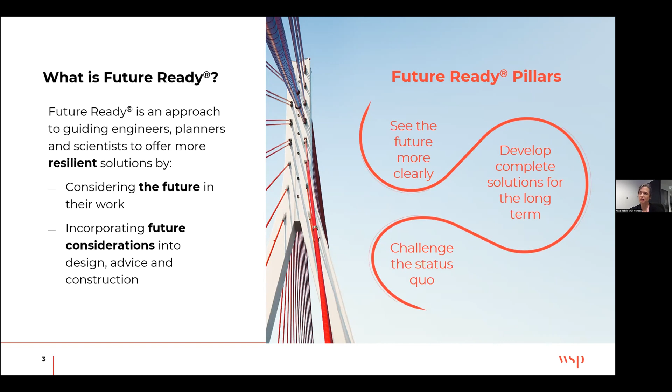Now, you're saying that's a bit high level. I will show you a little bit more of the detail into exactly how it can work.

This Future Ready framework, this is essentially it in a nutshell. These 4 different trend categories that we look at are climate, society, resources, and technology. I'll take some examples. These trends I'm showing you here are mostly from the city of Fredericton, though some data is at a more aggregate level, provincial or even national. But here's what you do.

For the climate, for example, our maximum 5-day precipitation will increase by 10% by 2050. So what does that mean for our built environment? Well, 10% doesn't sound like a lot, but it might mean a lot more area is covered by flooding than what we have right now. So that might mean you need to think about zoning setbacks. You might not want to build in places you've been building in the past.

Weather will become less predictable, which can make it a struggle when you're planning construction. Something might come up and you just might not be prepared for it. The number of hot days will increase by 250% here in Fredericton. That is massive. That could shift the tipping point of the kinds of decisions you make, economic decisions about insulation versus positioning of a building, even location of a building.

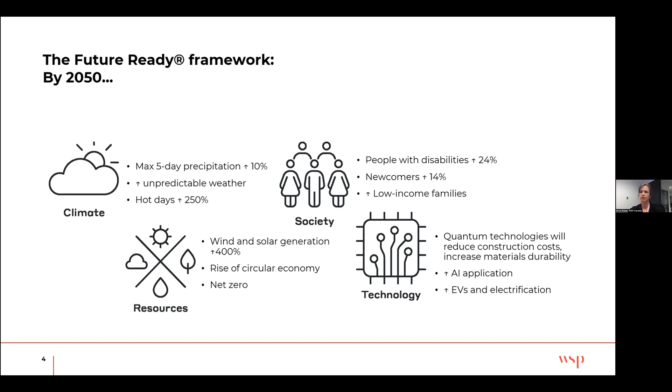So here's a major sustainability challenge in the construction industry. I try to wrap it up into what I call the bitter pill. There are 3 elements to this. There will be more construction, and the cost of each piece of construction will increase because asset lives will last less long than they have in the past.

Heat will make pavement melt. Increasing storms will batter buildings. Increasing storms and flooding mean that we actually have to replace our culverts with bigger culverts and our stormwater systems with something different. We'll have an increased demand for infrastructure.

So I showed you the increasing heat element. With increasing heat, it means we'll need to perhaps insulate more — maybe the buildings need to be insulated, maybe electric cables need to be insulated in ways they haven't. We'll probably need to provide cover for people because when they're outdoors, now they want to spend time outdoors, but it's just too hot a lot of the time. So what do we do about that?

On the water side, with increased heat, we'll simply have less water, so perhaps we need to build bigger reservoirs, for example. And then the cost of inputs will also increase. The cost of labor will increase. As you can imagine, being outside when it's hot, maybe it means you need more PPE, maybe it means you need to take longer breaks. So the construction season, the construction duration might be longer.

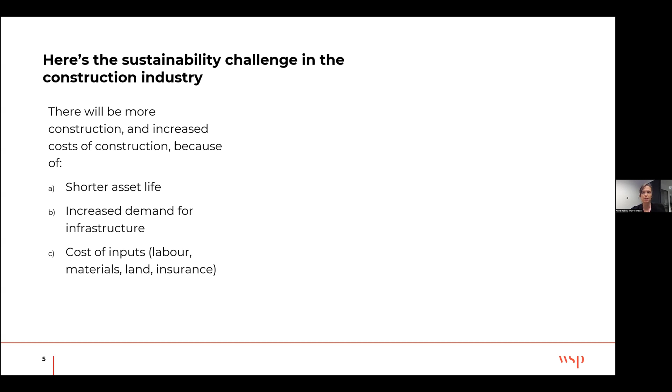Here's the bitter pill I talked about in the 3 dimensions, just for a bit of fun. You can see axis A is the replacement frequency, so the asset life just lasting less long — that cost builds up as you have to replace it more often. The quantity of asset — again, imagine increased heat and increased cover, we need more assets. And then the third dimension, C, the unit cost: what is the cost of those inputs and how will they change over time?

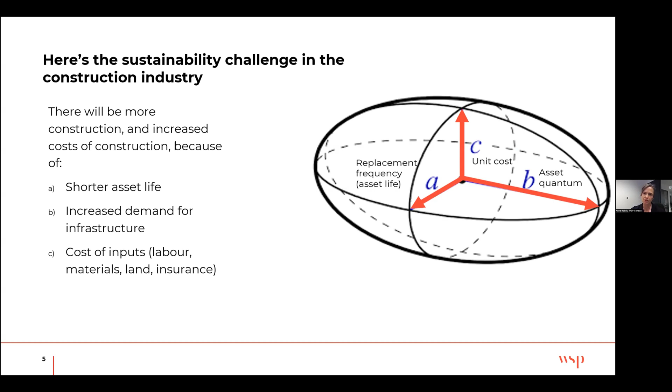Now I'm going to dive into those unit costs for a couple of examples of how climate in particular will be changing.

What you have across the top is labor. These are different elements of cost of construction: materials and equipment. The next one across is insurance, and then the next one across is time. So what I'll do for each of these elements of unit costs is show you how they'll be affected by increasing heat, flooding, and increasing storms.

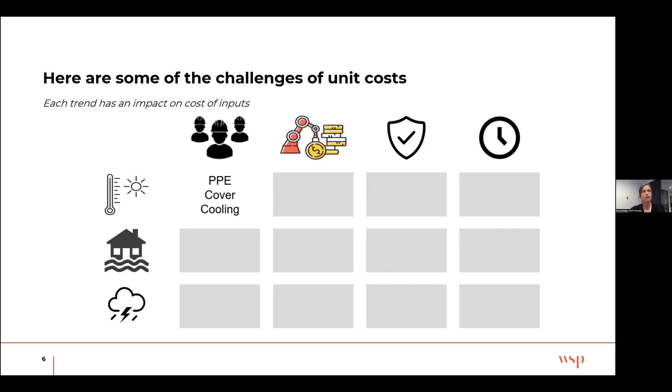So the first one you see is for labor and heat, and I've already mentioned those. People will need increased cover and increased cooling to keep them protected.

Then what will heat do to equipment and materials? Well, you'll probably have more frequent breakdowns, or you'll need more downtime for equipment. You'll also need more resistant materials, which may be more expensive. In terms of insurance, I can't say there's a lot of direct relation to heat, not one that I thought of anyway. But then in terms of time, there'll be much more downtime for your equipment and for your people. All of those are just a few examples of how the costs of construction will increase based on increasing heat.

Now, based on increasing flooding, employees will need to take leave because their properties will become flooded. I've seen some research that shows that people affected by flood take about 10% more leave, which can't be surprising at all. You need to deal with these kinds of things.

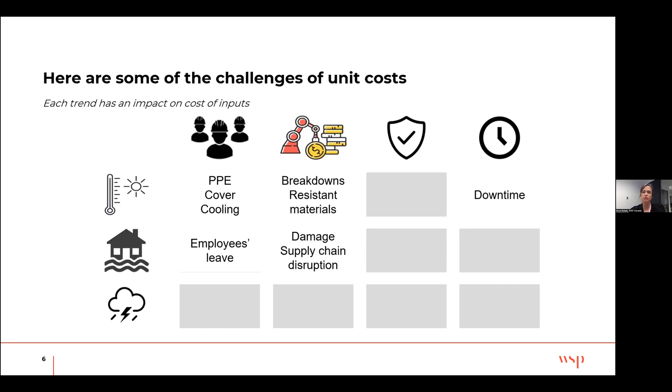In terms of materials and equipment, of course, flooding will cause damage on your site, and they'll also cause disruptions to supply chains. Now, in terms of insurance, flood insurance will start costing more because we will have more flooding. And then in terms of time, of course, there'll be disruption to schedules because of flooding. And that could be because there was a supply chain disruption, or it could simply be because you had to halt your construction because of flooding or extreme weather.

Now, finally, extreme weather, what will that do for your employees? Well, an increased risk of injury to them. In terms of equipment and materials, increased storms will increase damage on your site and increase supply chain disruption. In terms of insurance, of course, the cost of insurance for storms will increase as well. And finally, in terms of time, of course, your schedule disruption will increase because of increased storms.

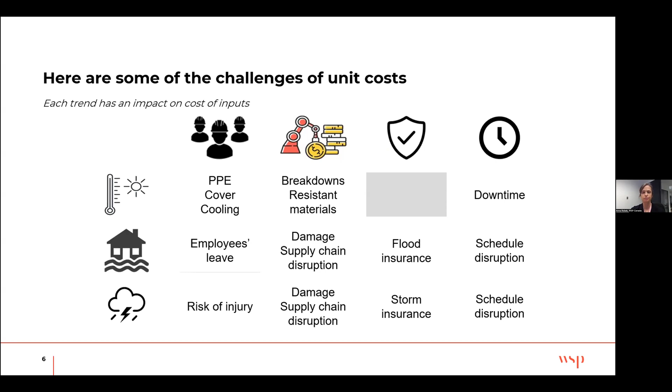Now, I did tell you that I would be diving specifically into the role of technology and how it could mitigate against these increasing cost elements. Technology is not the only way - there are some fantastic green solutions and behavioral solutions that apply not so much to the construction site, but more so to deciding what will be built in the first place. But now, diving into the role of technology specifically.

On the design side, because there's more accuracy introduced through building information modeling, that actually reduces rework, and there have been examples shown where rework was reduced by about 20%. Then in terms of the review aspect of design, that data sharing also reduces the time and cost to do reviews.

And then in construction, there are several different technologies. 3D printing, for example, can cut up to two-thirds of the cost of construction. Now, not in every instance - this is specific to complex shapes. So if you have a simple building, 3D printing is probably not going to save you anything, but for a more complex shape, it can save a lot.

Real-time location systems - just knowing where your vehicles are, where your employees are, where your materials are at any time - has been shown to reduce fuel consumption, labor, and supply chain costs by 10 to 20, 30%. Imagine knowing that, oh, we have one more pipe there, we need to order the next round in at a glance.

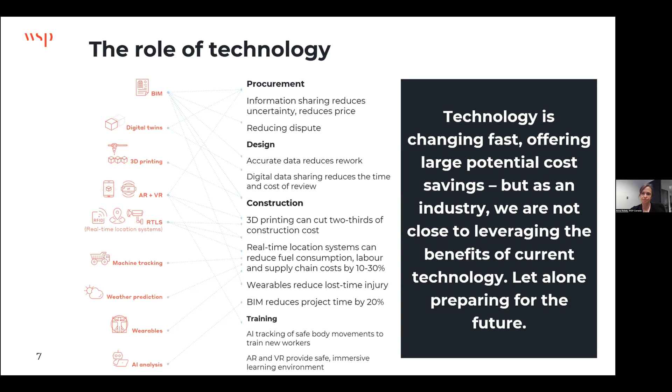The first one is simple: it's the fear of the unknown. If you've never dealt with something before, you don't even know how to make a decision about it, which is closely tied to the next one, which is a lack of experience. Of course, if you don't have experience with something, you don't know how to make a decision about it. You don't even know where to get started or how to get started.

Now, another interesting barrier is around the way we make decisions as organizations. A challenge here is that decision-making structures don't necessarily enable us to do things in new ways, to adopt new technologies. Maybe technology is in the IT department, and maybe sustainability is in the sustainability department. So how do they come together to make decisions to start bringing in smart technology that improves the sustainability of a building, for example?

A fourth barrier is simply strong, resistant stakeholders. Sometimes it's groups that have a stake in a certain material or a certain way of doing things. It could be laborers who are afraid that their jobs could be taken away.

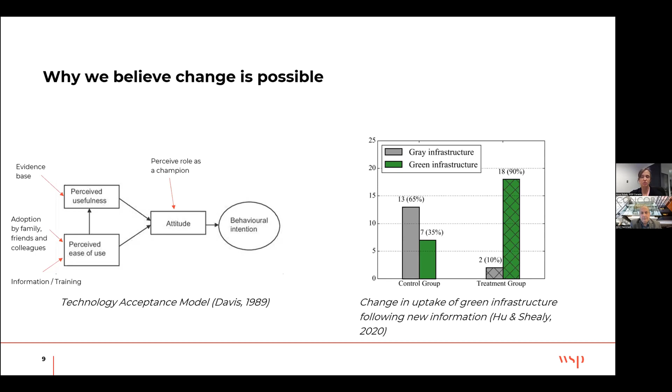Now, in our Future Ready program at WSP, we right away went to the tools and templates because we thought this would make it so easy for people—they'll get it, they'll be able to pick it up and go. And while it did make it easier, the thing we were missing early on was having people actually accountable for applying Future Ready in our projects, and a policy that set that commitment.

So these are absolutely critical to making change in industry, and that's really what I wanted to share with you today. I hope that you now believe that change is possible, and that perhaps some of these trends and their impacts are ones you hadn't seen before, giving you new ways of thinking about how you might approach them. Thank you very much.

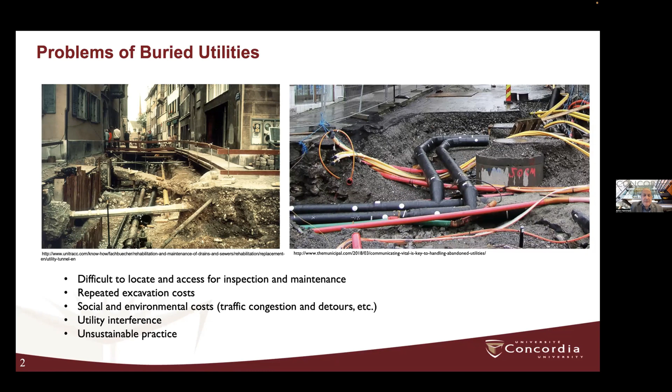So here I'm showing the problems of buried utilities. Most of us are familiar with these scenes. These utilities are buried in a way that is very difficult to locate and access for inspection and maintenance. That will result in repeated excavation and related costs, and also social and environmental costs, for example traffic congestion and detours. Also, we have utility interference, which is a huge problem. So we can conclude that this is not really a sustainable practice.

In fact, we have a very nice solution for this problem—I call it here multipurpose utility tunnels, or MUT. An MUT is an underground utilidor containing one or more utility systems that will permit the installation, maintenance, and removal of the systems without making street cuts or excavations.

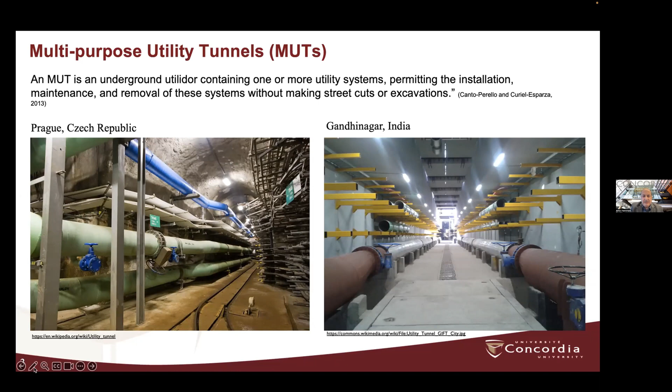We have a couple of examples. The one on the left is from Prague, which is a pioneering city in this type of project, and another one on the right from India. In fact, we also have utility tunnels at Concordia.

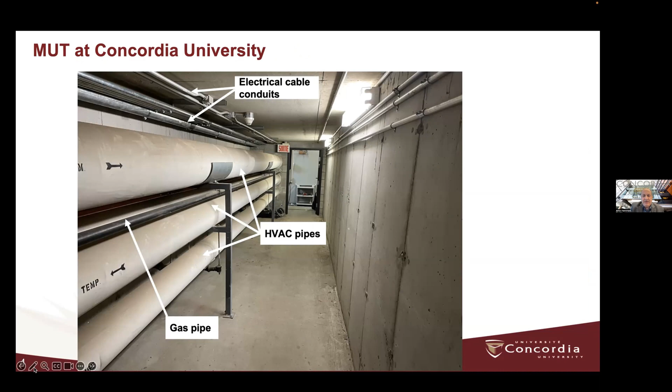A couple of weeks ago, I had a chance to visit one of these tunnels. Here you can see the different pipes for HVAC, for gas, and also the electrical cable conduits.

We can classify these tunnels according to depth. We have flush fitting, where it's not really a walkable tunnel but very easy to access. We have shallow tunnels up to 2 meters depth, and we have very deep tunnels like this one, up to about 80 meters of depth.

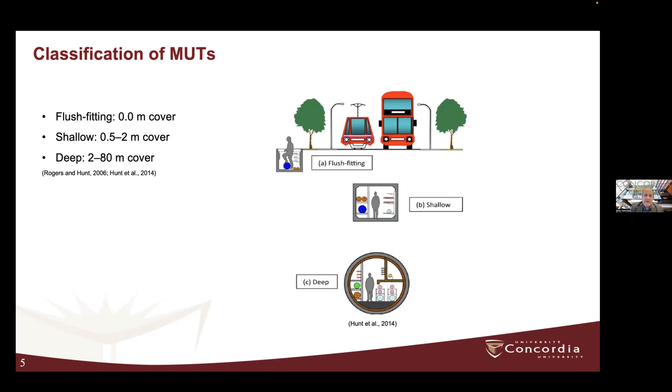Some of these tunnels were built in Qatar recently for the soccer games—they built a new city with this type of tunnel network. I have another example here from Singapore.

This is a more sophisticated tunnel where we have multiple compartments to separate the pipes, the municipal utilities, from telecom and electrical cables. So that will give more secure access to different utilities.

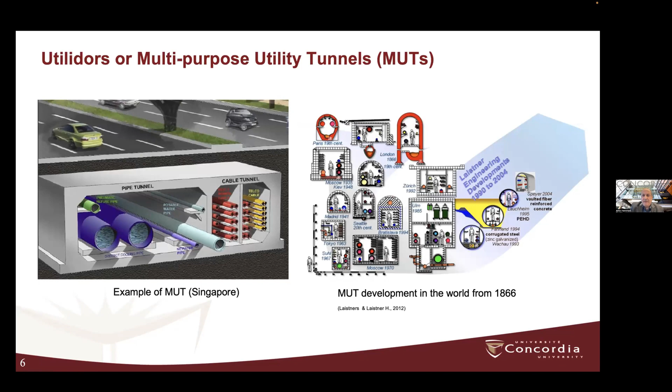This is not really a new invention. These tunnels have been used for the first time in Paris around 1866, and then another tunnel in London, then other cities in Europe, and then the idea spread to other parts of the world, as you can see here. So in the 19th century, there were only 3 of these tunnels.

And then we started seeing more of these tunnels in the Far East, in Japan, for example. And even in North America, we have many utility tunnels, but they are more in institutional facilities, like the one I showed you at Concordia, in university campuses or military bases or airports and so on, but not really under the roads. We don't have any tunnel, as far as I know, under a public road.

Here we can see more and more tunnels up to 2000. And then in the last 10 to 15 years, we see a lot more of these tunnels built in China. In fact, that's because of an initiative by the Chinese government. They have about 10 pilot cities where the Chinese central government was paying for these tunnels, and they are still building a lot of these tunnels. We can see also some of the projects in the Middle East.

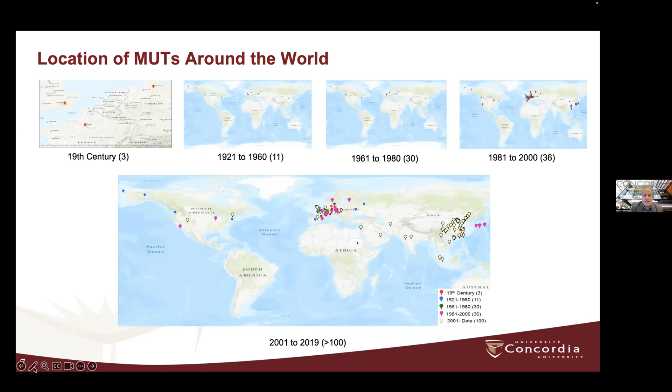So it's not a single tunnel under a single segment of the road. It could be a network of tunnels.

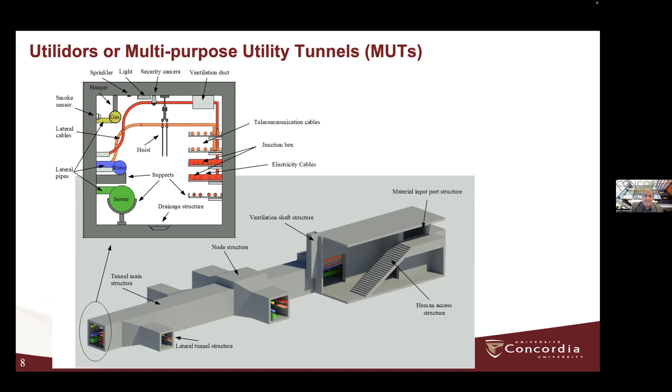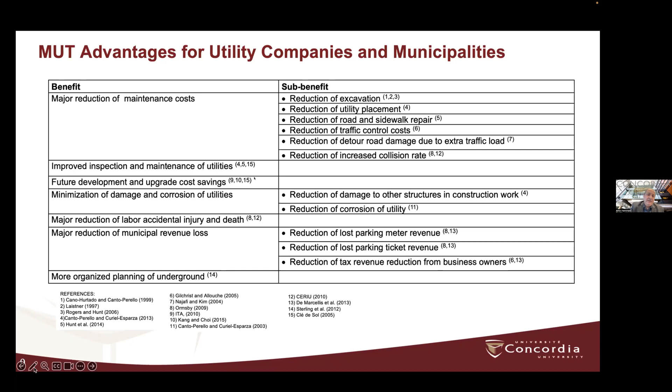We can appreciate the advantages of these tunnels, but I have here 2 slides. The first one talking about advantages for utility companies and municipalities. We have major reduction of maintenance cost, improved inspection and maintenance of utilities, future development and upgrade cost saving because we have extra capacity for the future, and many other benefits.

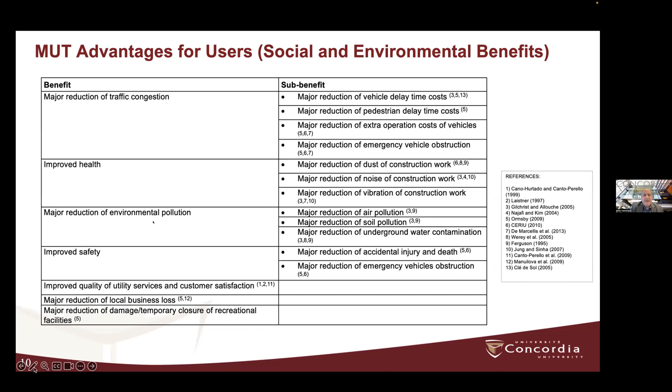We have also more benefits for the users. So here we are talking about social and environmental benefits, such as major reduction of traffic congestion, improved health, improved safety, major reduction of environmental pollution, and so on.

On the other hand, we have some disadvantages, mainly the high initial cost, especially in case we are building these tunnels in developed areas, developed urban areas, so that will require a lot of cost to be assigned to relocating the utilities and so on.

We have also compatibility and safety issues, for example, gas leakage. In fact, we have solutions for that. We have a lot of sensors that can help in the early detection of any leakage.

We have coordination and governance issues. Who is going to manage and control the access to different assets and so on? We have also security risks like terrorist attacks.

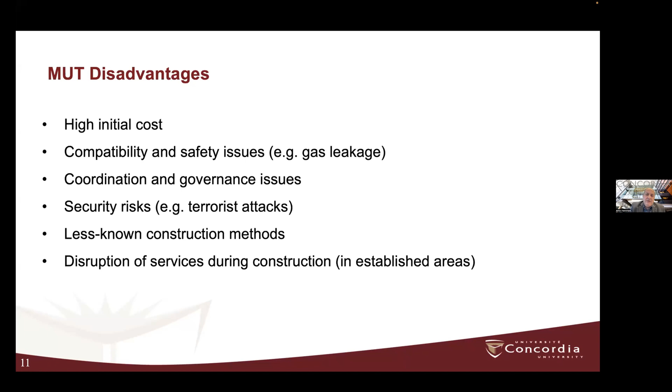And as mentioned in the previous presentation, we have less known construction methods for this type of projects. And as I mentioned, related to the cost, we have disruption of services during construction, and that's more specific to building these tunnels in established areas.

We looked also at the economy of MUTs. So here we have the different phases of the life cycle of a tunnel, the planning and design, the construction phase, the operation phase. We have these two major groups that I mentioned for the costs related to the utility providers and municipalities versus the social and environmental cost.

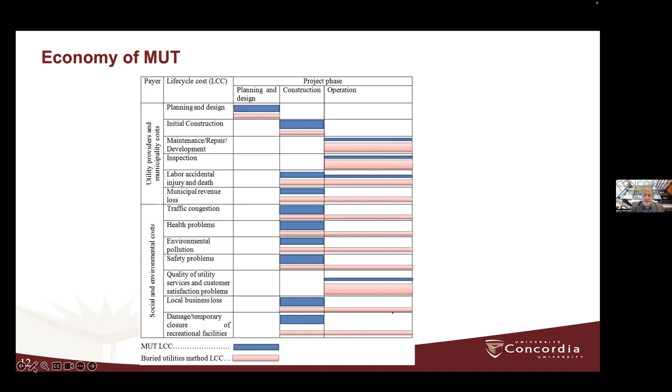As we can see here, we have the pink showing the costs related to buried utilities versus the blue bars showing the cost related to the MUT. So we have high initial costs here for the MUT versus very high social and environmental cost for the buried utilities in the operation phase of the projects.

We did a couple of studies. I'm showing here the study related to the MUT economic assessment and cost sharing. So in this study, we have two phases. Phase one was about the life cycle cost assessment or economy assessment.

So here we want to see if the MUT is an economical solution for a specific location. I should mention here that the MUTs are not applicable everywhere because they are costly. So here we are going to compare the life cycle cost of buried utilities versus the life cycle cost of MUT.

Based on that, we can decide whether a certain location is a feasible potential target for the MUT.

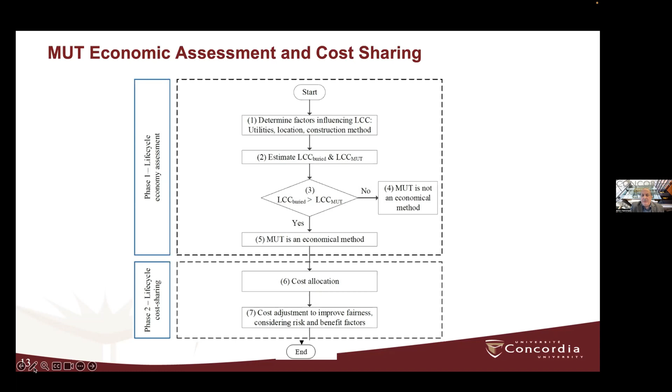Phase two is about the life cycle cost sharing. Here we try to see how the city or municipality is going to share the cost with different service providers, such as electricity, gas, or telecom companies. We have to think about how to share the cost, and we may want to adjust it to improve fairness, considering risk and benefit factors.

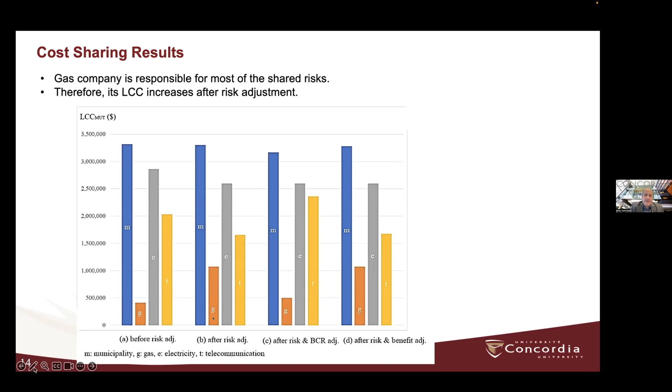We had another study about location selection. As I mentioned, we have to define the most feasible locations. We applied multi-criteria decision-making for MUT location selection. There are a lot of factors to consider, but basically we have to look at high traffic density above ground for the roads.

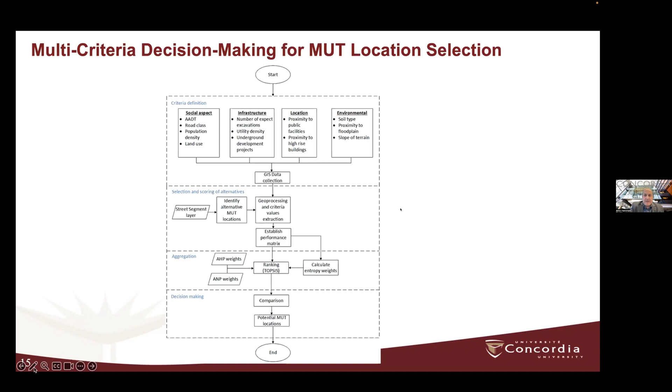We collected a lot of data from the city and applied it in a case study. We have a lot of GIS maps related to traffic, road class, population density, land use, and water break rate, plus the electricity network and so on. We didn't have access to all the data from private companies, but we got enough to do the study.

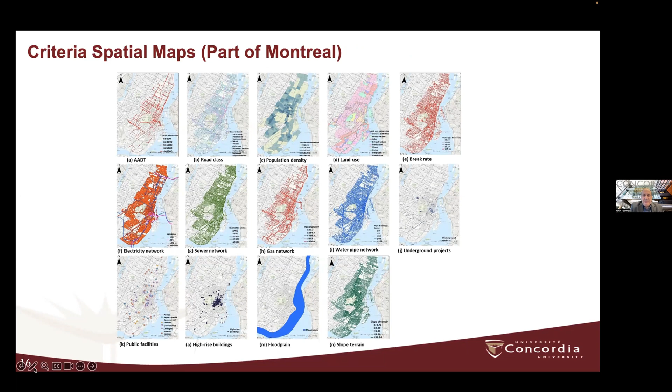We also had other data related to public facilities, the location of high-rise buildings, and so on. Based on this study, we were able to locate the most feasible locations for the utility tunnels. As expected, we found that most of them are in the downtown area, and we assigned a score to each location.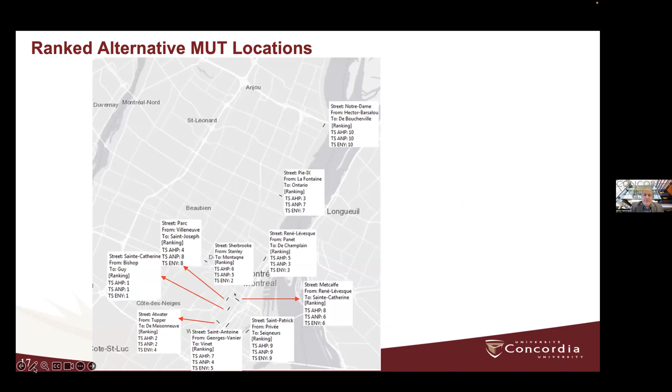This study resulted in a report published by CERIU, an institution for research on public infrastructure systems, supported by funding from the city of Montreal. We have the report in both French and English. I was very happy to see that Montreal is taking this initiative very seriously, and they considered embedding one of these tunnels in a recent urban development project.

While doing this research, I felt a bit lonely, and the students also felt a little frustrated, because we thought we were the only ones in North America doing this type of research. Then, around five years ago, I was very happy when Terri contacted me from New York City and mentioned they have a similar initiative, which I think she'll explain in her part of the presentation. Thank you.

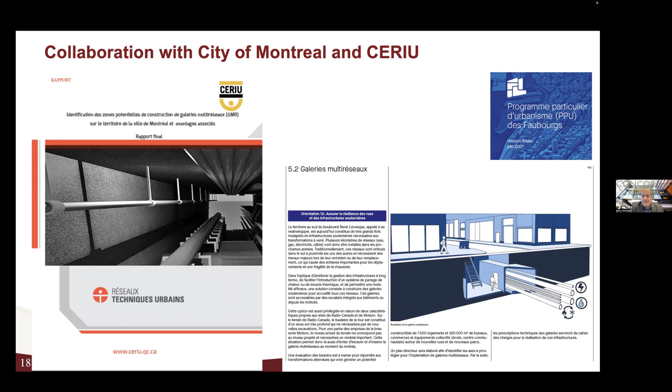Okay, let's see if this works. Share screen. Oh, I think, Amin, you have to undo that. I stopped sharing, I think, no? Okay, hold on, this is where everything breaks down for me, it's technology. Okay, let's see—is it the same one you sent me yesterday? I can share on my... yeah, but I should be able to, I'm going to try not to swear because that's bad.

Hold on, do you see this? Is everybody seeing my presentation? No, okay. Okay, all right, let me share on my side, Terri. If you do that, that would be great. Yeah, sure, okay, let me get back into the Zoom. Oh, there we are.

Okay, let me... can you see the slide? Not yet, we see you. Oh sorry, one second, share screen. Okay.

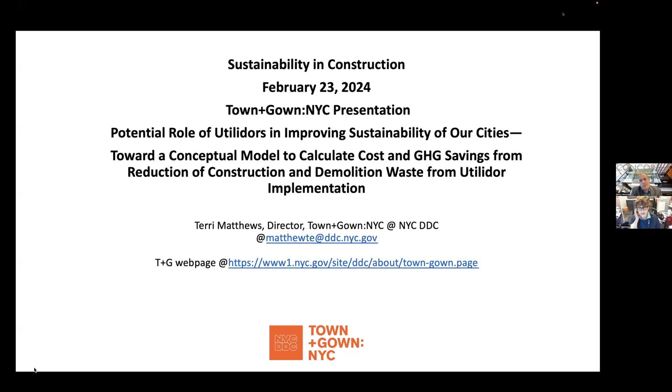So you don't have to read this, but the thing is there are like 10 people who talk about utilidors. You're talking to 2 of them. We're all looking at the same literature. Professor Hammad's work has been really helpful on our end, but it's financially sustainable. And everybody's been saying it's environmentally sustainable. You can talk about traffic emissions. I mean, calculating all this stuff is really hard when we don't even, it's just hard.

And so in this article, I thought, well, you can definitely calculate the savings from not needing to do construction in the future, which is getting to the next slide.

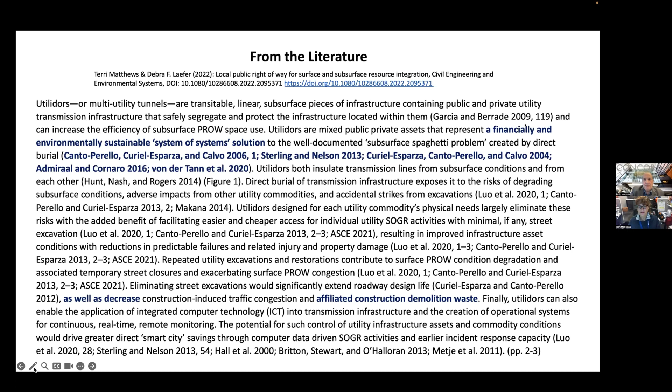Let's see, I'm really not good at this. This is the work that brought Professor Hammad and us together. We had a life cycle cost benefit project. Columbia School of International Public Affairs actually used our data, our construction data, to do phase 1 of his approach, which is the life cycle cost benefit analysis. It was done, it showed positive over negative, which is always good as a preliminary sort of result.

And last fall, we began a value engineering study. This was official, New York City, to validate that assessment. And that process is ongoing. Professor Hammad actually participated in that one as well. But now we move over to the next one.

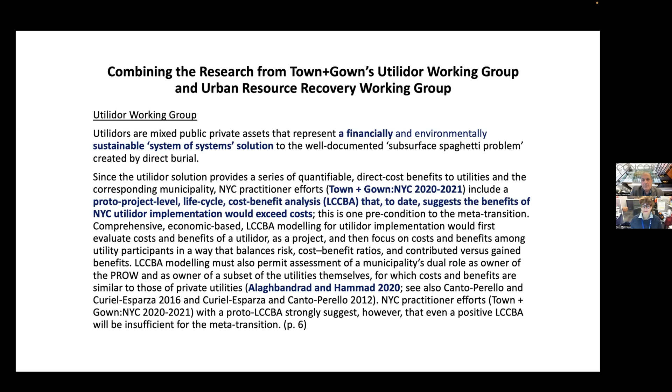So we know it probably makes economic sense. But for this moment, so that was our Utilidor working group. And for this, okay, so what are the environmental benefits? You can look at reductions in traffic detours, but in a city like New York, you're always going to have something, so it's unclear how you model that. Although it just seemed simpler and actually related to the work that Professor Hammad did by looking at the reduction in CDW, because once you put something in, you don't have to dig up the street ever again. And that seemed a lot closer to the financial model that Professor, like it comes from that.

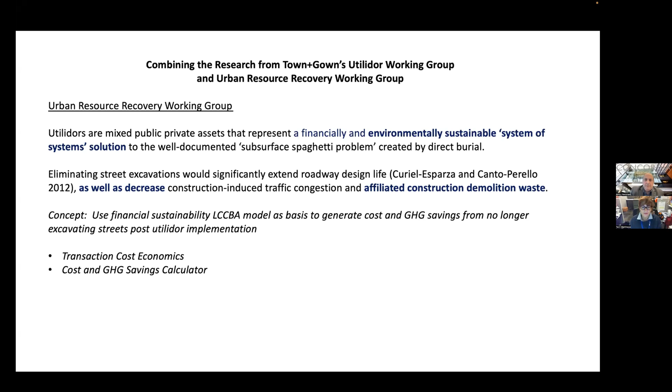So we have an urban resource recovery working group, and let's keep going. So what we're doing here, this is like a nice visual, the only nice visual I have, showing the construction system. This, I'm not going to go into it because I can't remember how I did it in the first place, but it applies transaction cost economics.

I did this one day and I thought, well, let's look at the economics of the thing. You have a construction project, it generates CDW. Where does it go? It could go to be reused, or it can go to the landfill. And this looks at all the participants and starts looking at the economic, because everybody talks about green economy. Well, at some point you got to focus on the economy and you got to focus on the businesses that are doing it. So that's the big kind of thing that's going on in the Urban Resource Recovery Working Group. Go to the next one.

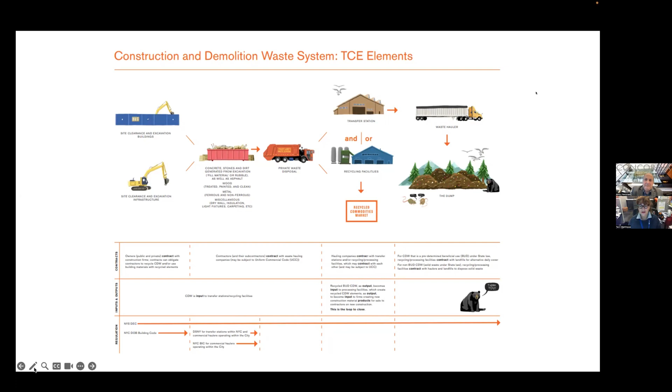So in this, we've been at this. We actually started this working group in 2017, focusing on reuse of recycled concrete aggregate. And the more we look into recovery and reuse of construction demolition waste, it becomes very material specific. Like you have to do it for concrete, you have to do it for soil, you have to do it for gypsum, which is a wallboard, because when you break down this stuff, they have properties and stuff like that.

But last spring, we focused on excavated soil because we learned of a company in Long Island that takes excavated soil, which has a high proportion of sand, because that's the glacial till from the glacier that left on Long Island. And this company takes it and washes it. It's a technology that was developed in Ireland. They bought it, they wash it, they separate it into sand that can be reused into concrete, small stones, large stones, and silt, which is dirt.

So we had the students do a calculator for the difference between sending the excavated soil to a landfill versus sending it to a processor to separate it out and reuse. And it kind of comes down to transportation costs, which has an impact on GHG emissions, plus the GHG emissions that you save by not mining new stuff.

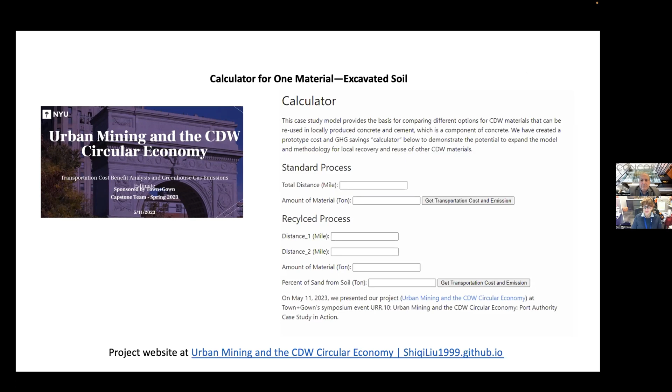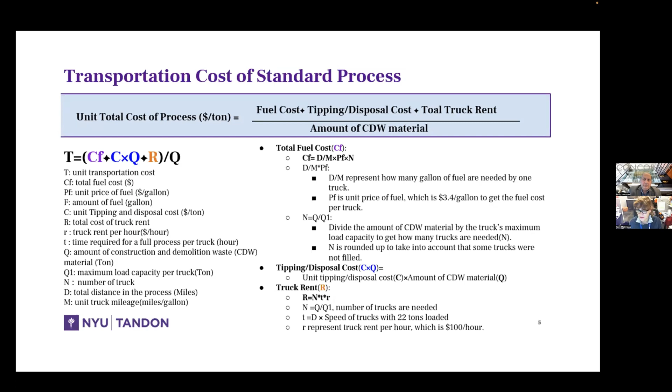So we have this very simple, and you can go forward. They made a calculator where you can plug in things, and don't ask me to explain this, but this is how you do it. And it is actually really fact specific, like what's the size of the truck, how many loads can you get in a truck in a day going between two places. But the students did it, so there's the transportation cost savings. And then go to the next one.

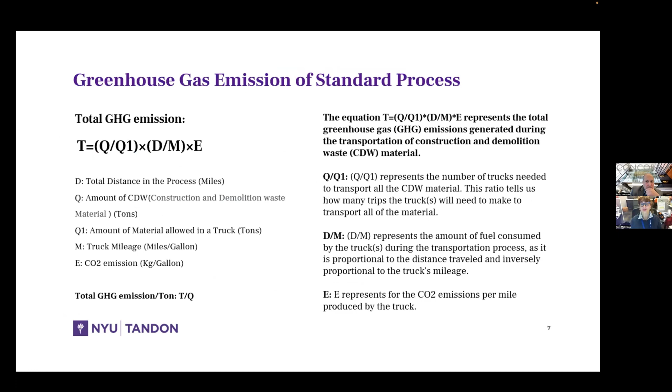You can do GHG gas emission savings from not doing all this transportation. So this is the framework for the next slide. I looked at this and thought, okay, so we got a calculator. Let's go back to utilidors.

Once you put it in, that's your new baseline, kind of like when you did the financial modeling. In the literature, we multiplied the cost of direct burial by 2 and said, that's your number. But once you put it in, there are environmental costs to all of that, like the GHG costs of mining new materials, because you're not using recycled materials for a new utilidor. But once that's in place, it's all the things you would have been digging up the street for.

And let me tell you, it's a lot. You're digging it up, you're putting it back. That's where you can start calculating, using that calculator, it's that simple. This is not like physics, this is very simple math, but it requires a lot of facts, and you have to get into the fact specifics.

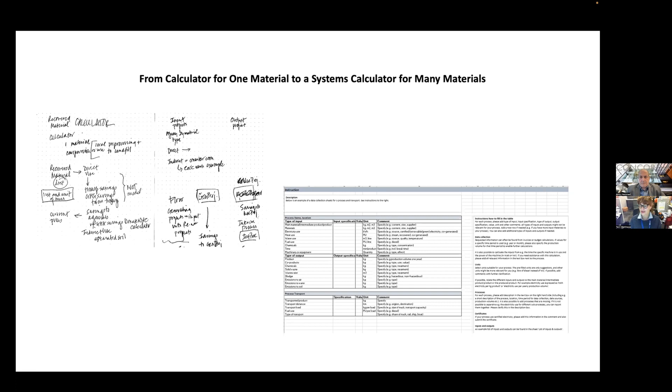So this was a conceptual model trying to tie together the utilidor, which someday may be implemented, and building the case that you can save a lot of future GHG emissions once you put it in place. So that is my conceptual model. That's where we are today in Town and Gown. This is going to take a lot more work to do, but since we haven't implemented utilidors yet, we have time.

And that's pretty much all I have to say. Did I go over, or am I good? It's food for thought, for people who now understand about utilidors.

Thank you, Ali. I think you stopped my video, so no one can see me probably. But that's okay, if you can hear me, that's good enough.

Thank you for the introduction. Sean is going to be guiding the presentation today in terms of the slides. Good morning, and thank you for the opportunity to present to you regarding sustainable design and construction practices at the City of Edmonton. I'm going to introduce my colleagues, Mary Baczynski and Sean Allers, who will be part of the team presenting. We're here to talk about the City of Edmonton's sustainability policies, C532 and C627, and how they relate to ongoing work within the City of Edmonton. Time permitting, we'll answer some questions at the end.

Next slide, Sean. Thank you. So our agenda today is to discuss the C627 climate resilience policy. Mary will be providing an overview. I will be providing a little bit of history and background about how we take the policy and start to implement some of the policy requirements. And then Jack is going to talk about some of the projects we've recently completed as a result of the policy being implemented. And then questions. Next slide, please.

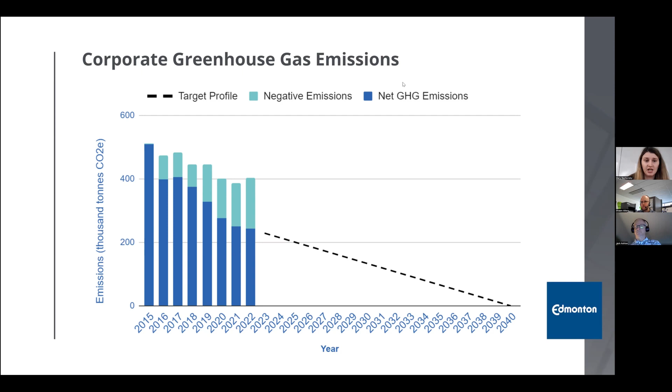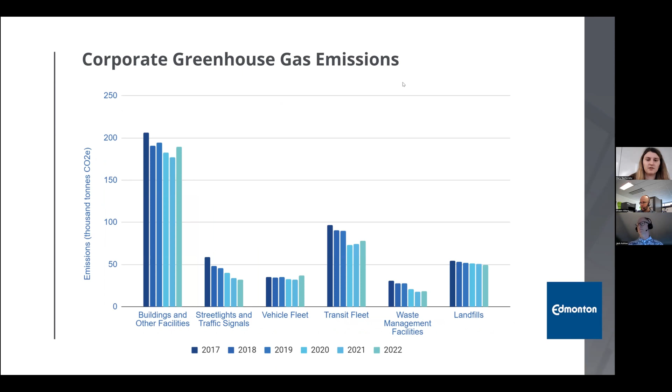On the next slide, we have a breakdown of the corporate emissions by sector, not accounting for those RECs for electricity consumption. You can see buildings make up about 50% of our corporate GHG emissions, so they're a large focus of our emission reduction efforts.

The most significant requirement is that new buildings are designed to be emission neutral, which is defined as a building that is highly energy efficient and uses only renewable energy for its operations on an annualized average basis, or produces and supplies on-site renewable energy in an amount sufficient to offset the annual greenhouse gas emissions associated with the energy consumed for its operations.

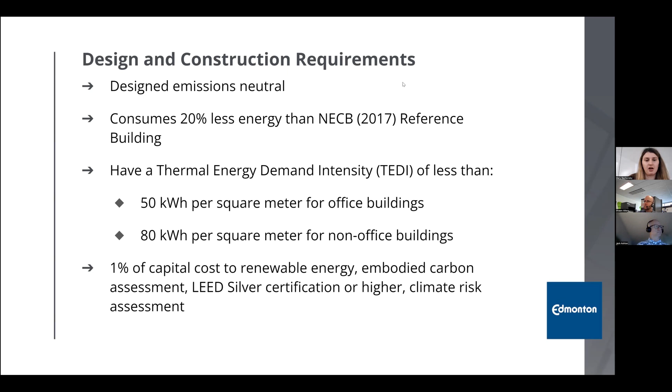There are additional requirements as well: to consume 20% less energy than the code requirement, to meet a thermal energy demand intensity target based on the space use, and that 1% of the capital cost goes towards renewable energy. There are requirements for an embodied carbon assessment and a climate risk assessment, as well as achieving LEED Silver or higher. Now Sean will explain the history and background of C627 and how these targets were developed.

Thank you, Mary. As was talked about, we had two policies. A lot of the information from the older one, C532, got used for the newer one. Back when we were starting to think about this in C532 time, we were asking ourselves, what metrics should we use to define what these new sustainable buildings should look like?

We had an old policy that referenced MNECB 1997, for those who remember that. Comparing buildings to a standard was something we felt we could start with, except we would use at that time National Energy Code 2011 as the baseline.

But the real goal of the policy was greenhouse gas emission reductions for the new buildings, so we wanted a target associated with that. We were looking for something related to a standard, NECB 2011, and on greenhouse gas emissions.

The other thing, though, a lot of us who've worked in the buildings industry for a long time had not seen a real good proper investment in building envelope when building new construction. Building envelope is likely the most important component of the building, and this is from a mechanical engineer. Because it has such a high initial cost, a lot of times it wasn't receiving the investment it needed, so that's why we looked at a third metric to add on there.

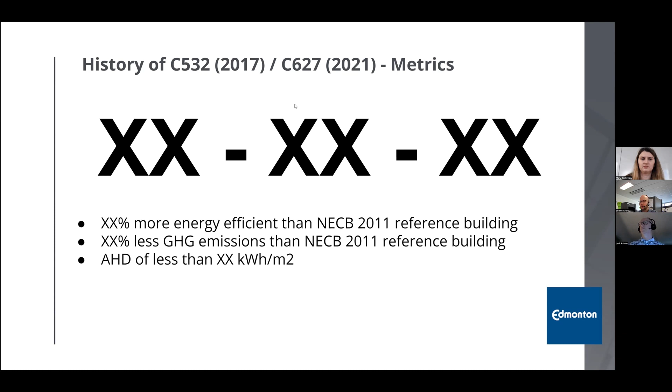So now that we had the metrics, how far do we go? What's the cost? What's the GHG savings? To find out these answers, we did 3 studies.

The first was a retrospective study on 5 city building archetypes: a fire station, a police station, admin building, rec center, and library. This helped give us an idea of our current state, or business as usual, relative to NECB 2011. As you can see, just designing and constructing things as we were already exceeding 2011 on a lot of different fronts. For the police station shown in the graph, we were more efficient than NECB 2011 on all fronts, but especially on the heating side.

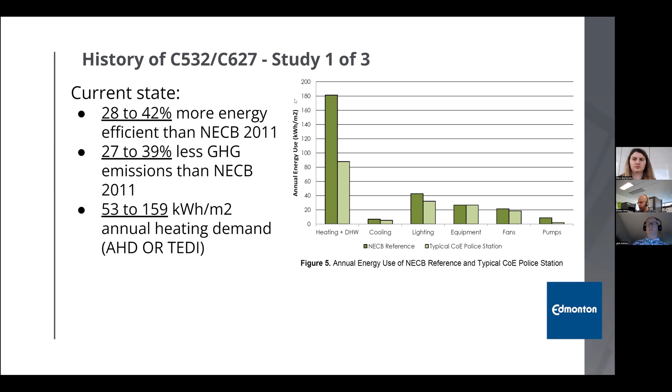The other thing this study did was look at pathways to higher levels of energy efficiency for each of those different archetypes. A piece of software was used by the consultants that looked at different envelope and mechanical system options, and scenarios that gave us the highest levels of energy efficiency for the lowest capital cost. You can see one result from a single scenario displayed on screen, with inputs on the left and outputs on the right.

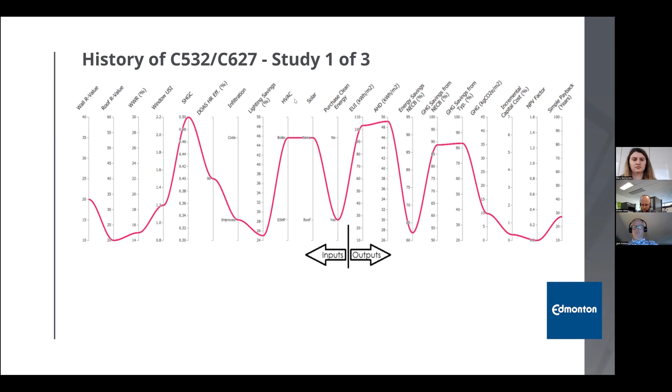Once we had the software set up, we ran hundreds of different scenarios to look for the most cost-optimized bundle. Most of the buildings, like police, fire, and admin buildings, were really close to the goals we were looking at.

Sometimes they just needed higher levels of heat recovery. The library needed higher R values. The rec centers needed their window-to-wall ratio decreased a little, or increased R values for windows and walls. The fire hall already had a low window-to-wall ratio, but again it needed some increase in R values. It was a really great piece of software.

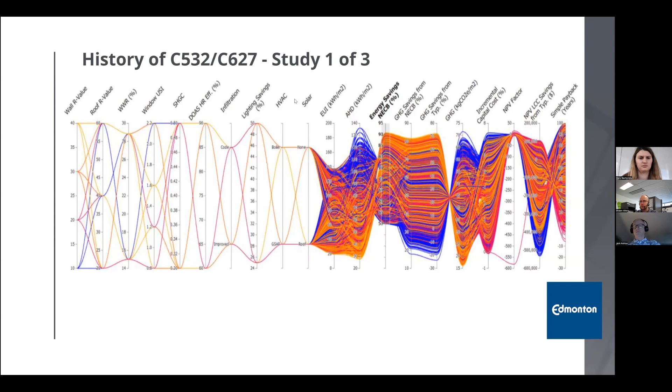We could look at incremental capital cost, we could look at life cycle cost on the right, narrow it down to a gap, and then on the left it would tell us what inputs would allow us to achieve those goals. So, study 2.

The second study involved an actual design team with architects and sub-consultants working on a mixed-use warehouse building called Ambleside. We had them complete their normal schematic design report like they usually would, but we had them complete two additional reports: one for the same building that was 20% more efficient than NECB 2011, and one for a version of that building that was net zero.

Note that all versions of the building had to meet the building functional program and all the requirements of the clients. There was no backing off required elements, no revised temperature settings, or any kind of cheating allowed that would sacrifice building function.

The consultants looked at various options to improve the base building, and those options had various different levels of cost. For the building they were designing, heat recovery and lighting tended to be the most cost-effective improvements that got us the best bang for our buck, while the envelope, as we discussed, was on the other end of the spectrum.

The consultant for that same project also looked at building orientation, examining solar angles to determine the optimum building orientation.

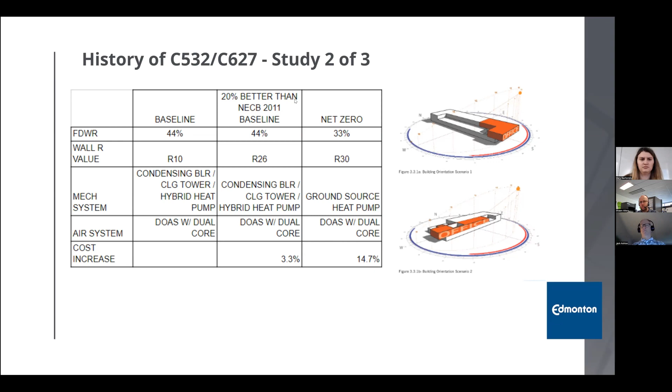When the three designs were finally complete, the mid-range option was very similar to the baseline, but making the building net zero required a reduction in the window-to-wall ratio and also moving to a ground source heat pump system.

Study 3 was on a fire hall called Windermere, which is actually constructed now. We again, at this point in time, had the design team complete three different schematic designs for three different levels of energy efficiency.

All three options needed to meet the rigorous requirements for a fire station, with no compromises or changes on function or operation. Again, when the three designs were done, the window-to-wall ratio stayed the same across the three options because it was pretty low already.

However, the mechanical system did once again go to a ground source heat pump, just to try and get the most efficient system we could.

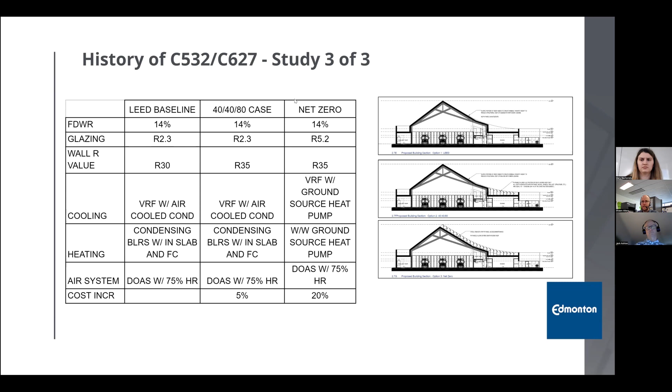Where did that end us up? Well, it's for C532.

Along with these studies, we met with a lot of people. We met with external local consultants, external and internal business partners, and we had a lot of meetings on this.

After a lot of that debate and those studies, we set these targets for C532: 40% more energy efficient than NECB 2011, 40% less GHG emissions than the reference building in NECB 2011, and new construction needed to have an annual heating demand, or TEDI, of less than 80 kilowatt hours per meter squared.

These were viewed as a little conservative, or easier to hit, by both internal and external parties, but it kept the expected capital cost increases low relative to business as usual.

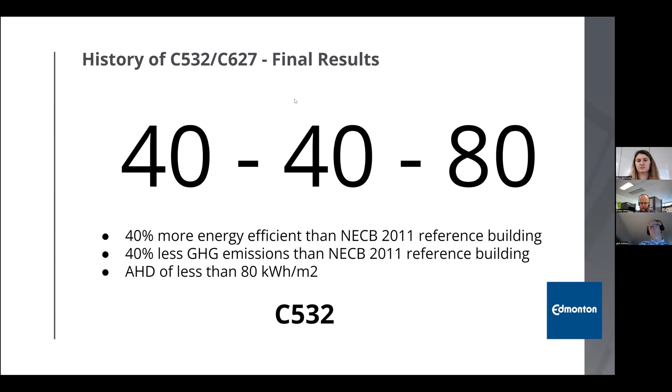The annual heating demand was also a bit of a challenge because at that point in time it was a bit of an education piece. People have come a long way in understanding TEDI and annual heating demand, but back in 2017 it wasn't as much of a thing. So what does that mean for C627?

The new one that came about used a lot of that same background information, except now we were referencing NECB 2017, which replaced 2011 in our jurisdiction.

We got rid of the middle target for greenhouse gas reduction simply because we asked for the building to be emissions neutral, so it needed to have no greenhouse gas emissions associated with it. We kept the envelope requirement because that was still very much something we were interested in pursuing and continuing to see.

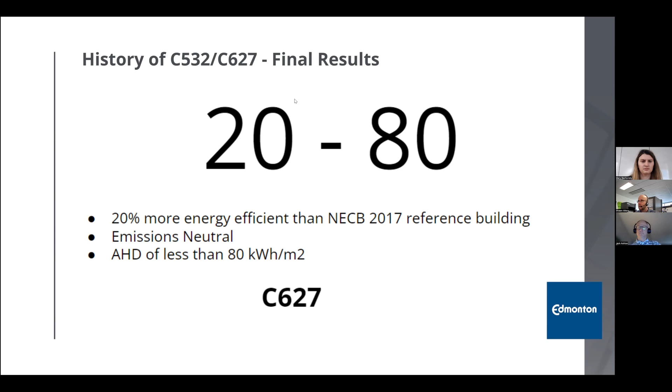Okay, that covers the history. I'm going to pass it back to Jack.

Jack, you're on mute. Thank you, Sean, for that.

Thanks, Mary. I think you can see how this all evolved from council declaring a climate emergency to the creation of the sustainability policies, and then Sean and his team really helping to define the requirements needed to achieve the policy statement. So what I want to share now is just some pictures of some of the buildings that have been built.

The geothermal field that powers the district energy system consists of 570 boreholes, 145 meters or more in depth, at 6-meter spacing. So it's quite a large field, used to power the thermal exchange in the district energy system, which uses glycol within the heat exchange loop. The building itself is quite small, with a large portion underground where all the equipment is. But it's a great little facility that runs, or will be part of, multiple district energy plants in the neighborhood.

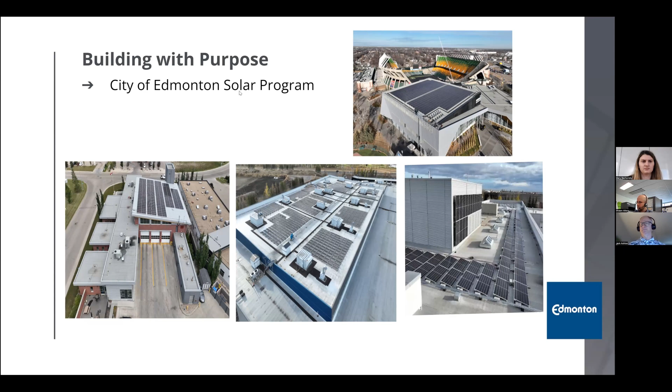Next slide, please. What you see here is actually the largest rooftop array in Canada. This rooftop array is constructed on our Edmonton Expo Center and was part of a large rehabilitation project.

There are 5,745 panels on the roof, spanning more than 193,000 square feet and generating about 2.8 gigawatt hours annually.

This is phase one of a multi-phase solar project. The cost of the photovoltaic portion of this project was $5 million, and the PV panels went into operation in November of 2022. The system will result in savings of at least $290,000 a year. The energy offset will be equivalent to the average energy consumption of at least 375 homes. The project has a lifespan of 25 years and is expected to yield payback in 10 to 17 years. That's one of our crowning achievements with our PV program so far.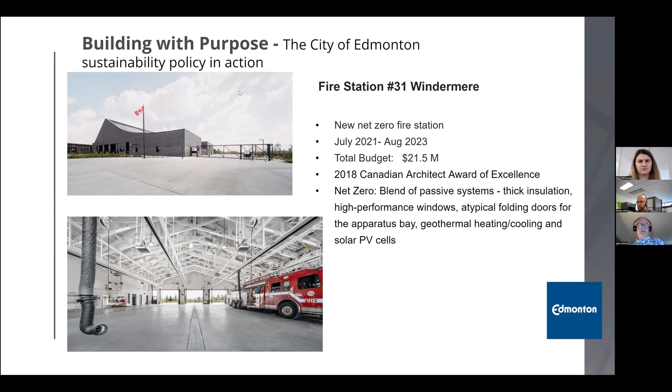You'll also notice the doors at the far end of the building. You may expect these to be the same as any overhead garage door on residential or commercial buildings. However, these are bifold doors, which allow for quicker cycle times to open and close, helping us achieve a higher degree of sustainability by providing less heat loss and heat gain depending on the season.

Next slide, please, Sean. This image shows a clear picture of the solar panels on the building structure, and in the smaller photo in the middle, you can see the bifold doors in the background photo. Next slide.

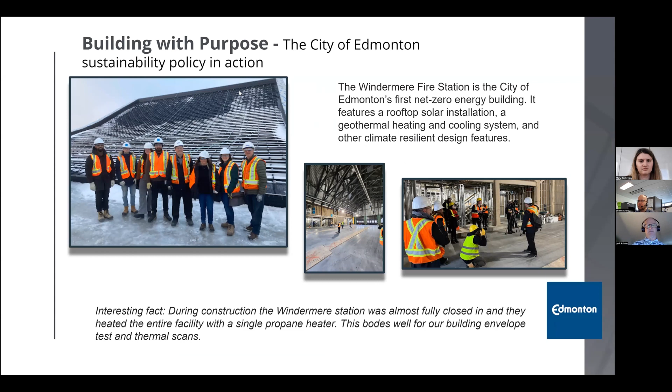Really, what we want to talk about is how the city of Edmonton builds with purpose and looking ahead. So some of the things we'll be doing in the future, we're investing more into our solar program of work. We have more projects that will be built under the C532 and C627 policies.

In fact, I did a little bit of research. Under the C532 policy, we have 9 buildings that are LEED Gold certified, and 25 buildings that are LEED Silver certified. Our Blatchford Fire Station, a new project, will be the first delivered under our new policy C627, as well as our Riverbend Library and our Rollie Miles Recreation Center. We're planning an expansion of the Blatchford District Energy System, and we'll be going forward with a phase 4 project there soon.

We have another phase of construction on the Expo Center solar project that we'll be implementing. We're also developing more emissions neutral facilities, and we're looking at heat pump and fuel switching projects in the future as well.